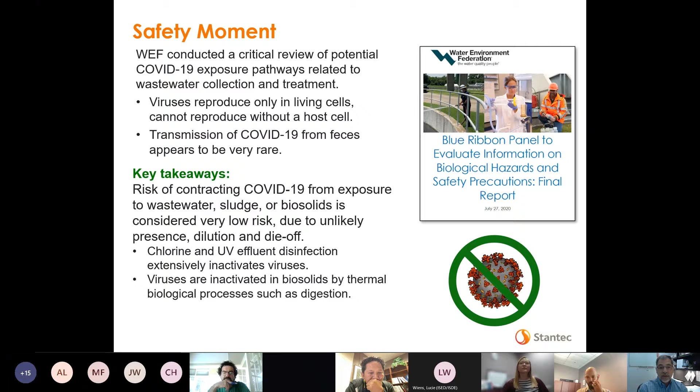We're looking at how can we get the foodstuffs and other important materials to these locations while not starving out other parts of the planet. We're looking at a crisis situation soon where if we do not start looking at how to use our resources better, we will end up in a shortfall, which will create a whole number of issues globally. So the forecast here is we're developing at a very rapid pace, and can we supply the demand?

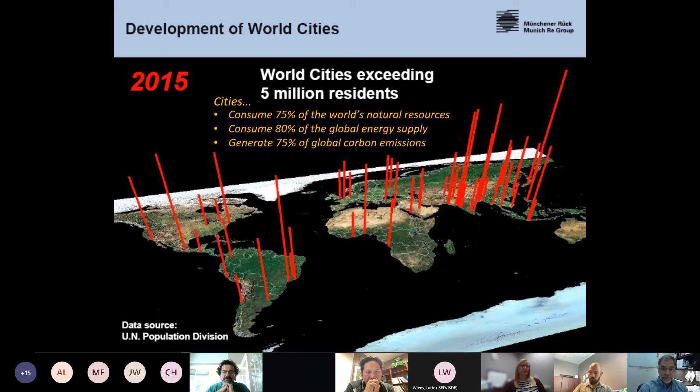Now, as a point we were talking about earlier, let's de-link economics from resources. We've always talked about supply and demand, but when you don't have enough resources, there's a whole other issue that can develop. Fortunately the economics have grown very well - we've done quite well in North America. We're talking about advanced technologies, specialized materials we need to pull out of the mines to make the chips that go with this. We've got lots of natural gas and oil and hydropower to generate electricity.

Our cities have grown, we're putting in more green space. However, if we get into urban sprawl, we take productive land out of production. So we're beginning to see densification in city centers - let's go up rather than out, so we can preserve these green spaces.

Global commerce - I'm sure we all shop at Amazon and realize how much is being shipped around the world in these containers. There's just so much goods moving around, and you have to think about all the energy and fuels being used to manufacture and move these products around.

And lastly, closest to home here, is intensive agriculture. There is more and more demand for foodstuffs. Manitoba, Saskatchewan, the prairies - we're in a very unique situation where we do have the ability to grow, but how much can we supply? How much can we grow without damaging the environment?

Unfortunately, what we're seeing now is the urbanization impacts of this intensive resource demand and the products we're delivering. Our air—we're talking about carbon taxes, climate change and how that's factoring in. Excessive nutrients are getting into our waterways, turning them green and fouling them for other habitat in the flora and fauna. We're now looking at farmland being overworked, becoming a desert. Add in a drought like we're experiencing this year, and that puts tremendous stress on our ability to supply food. And lastly, mountains of resources going into landfills as waste. We cannot continue to do this—our resources are being consumed at exponential rates.

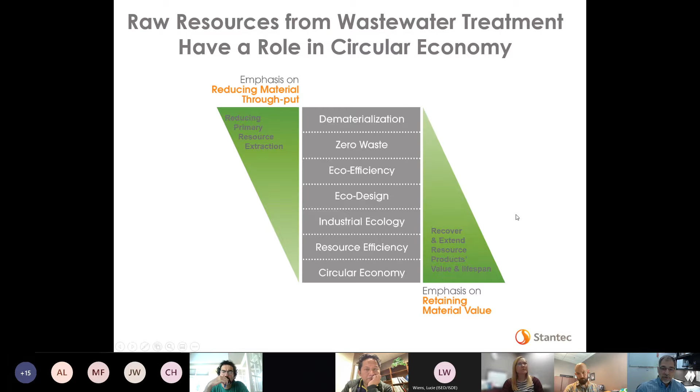Now I'm going to focus here on the wastewater aspect of this, but there's lots of waste that comes out of these different areas. I call them the residuals. We should not call them waste. I find that these are resources, and when we use the wrong terminology, we tend to put it into a category we ought not.

So really it's a resource factory. These residuals sent to treatment plants can be productively reused. For example, primary treatment can result in a lot of good primary sludge, which is rich in carbon that can be reused for multiple purposes. When we digest the solids, we produce biogas. You can generate green electricity from burning these renewable gases. The properly stabilized sludge can be reused on farm fields where it's put back into production.

Nutrients, we are now extracting nitrogen and phosphorus so they can be selectively put back out on the lands as can be used. More importantly, there's water. As we're experiencing this year, a drought year, we have a lot of water going back into the rivers and going for irrigation and other purposes. It has tremendous value, and of course it's disinfected to make sure it's properly sterilized so it can be used and not impact public health.

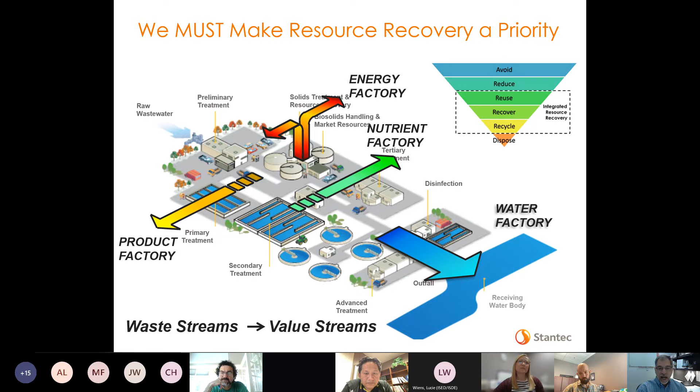Now the upper triangle here is a very important one where we talk about integrated resource recovery: reuse, recover, recycle. How can we find value for these products and not let them go into the landfill or some non-productive area? So the focus is, when we send these resources to this resource recovery factory, how can we put it back productively into the mainstream?

Now this is where we start getting into what we talk about as integrated resource planning. We start looking at where we are today. Why have we done what we've done today? What are the drivers, and what are we looking at in the future? So we need to start looking ahead to our investments in the next 5 to 10 years and use that as our guiding principle.

Not to say, oh, we need to expand, rather let's look at why we need to expand or upgrade, and look at the factors in advance so that we are building our businesses, supply chains, and resources in a way that's sustainable to the future. So we need some formalized strategies to make good and timely investments in this.

Now, the public needs education as to what is required. We as industry leaders need to get that messaging out to them, but also keep our listening ears open—we do have a very well-educated population out there that is now sounding the bell saying, we want better, we need to do better.

Now, this example here: what is the perfect wastewater treatment plant? Well, the perfect wastewater treatment plant is one with no waste. It is a true resource recovery facility. That is the fundamental basis of the circular economy—sustainability.

Earlier I had a chance to chat with some members of the Food and Beverage Committee here, talking about what we call sustainable. That means we're doing what we need to keep our systems balanced. Well, that's not good enough. We have to start thinking about what we call the regenerative economy.

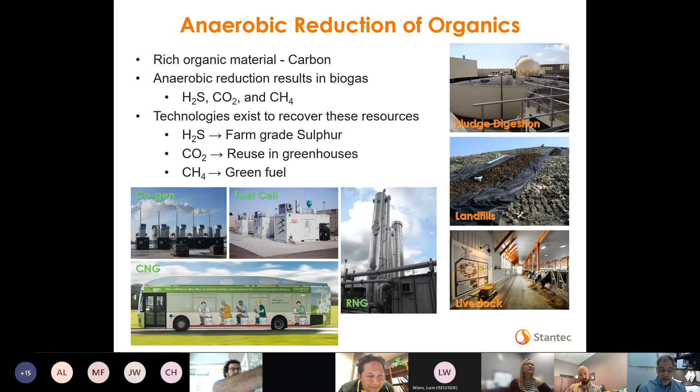Now, this is a very interesting project which I happen to be part of, just outside Washington, D.C. They bring sludge from four other large wastewater treatment plants to this location, where it's converted into energy and a reusable resource.

This is what we refer to as Class A biosolids—odorless, highly sterilized, fully stabilized. This is the kind of stuff that smells like earth. When farmers get this material, they love it. It has significant value in terms of nutrient content and soil texturing.

As part of this, the biosolids go through a digestion process where the gases are collected, conditioned, and converted into renewable natural gas, which is pumped back into the natural gas pipelines, or converted into heat for on-site use, or electric power put out into the grid.

This project was built for 235 million US dollars—that's 350 million Canadian. This is the kind of project I would love to establish here in Manitoba, where we have the opportunity for a win-win-win situation, taking these residuals and turning them into something we can all benefit from. It's green energy, and I think we have the opportunity to do that here.

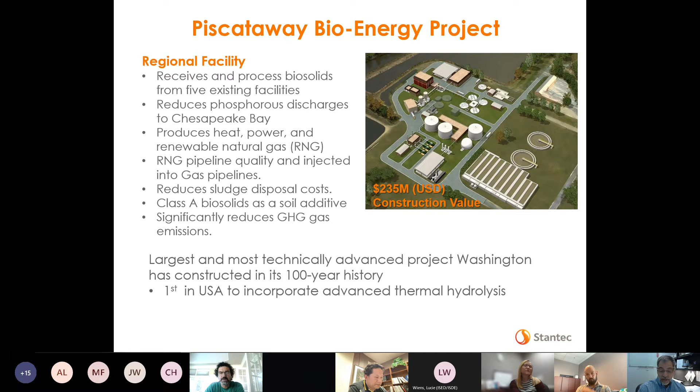Phosphorus recovery. We talked about the expression 'peak phosphorus'—there was concern that we'd run out of phosphorus worldwide, and this precious resource would limit how much farming we could do and how many plants we could grow.

So someone was quite clever and figured out how to extract this phosphorus source from wastewater and turn it into a pure crystal. These crystals are called struvite, magnesium ammonium phosphate, which is a slow-release fertilizer, so it also has nitrogen value.

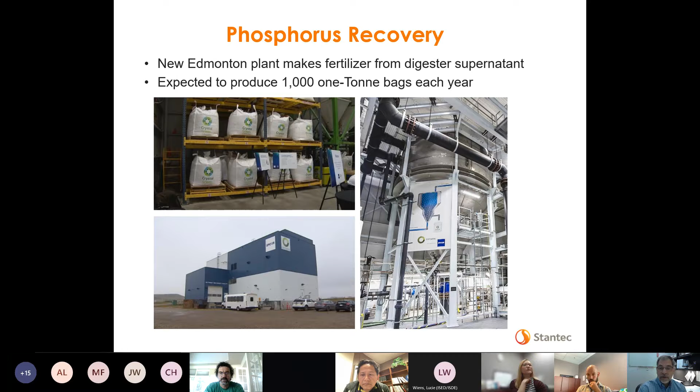This plant is another one I worked on, out at the Gold Bar wastewater treatment plant. It's a state-of-the-art facility that generates 1,000 one-ton bags each year. This material is put back out to industries that can use it, primarily farming and others. This is a good example of phosphorus recovery from wastewater, and we have a lot of wastewater plants—it shows the elemental value we can get out of it.

Something you don't really think about: sanitary grit. At the Edmonton wastewater treatment plant, they call this the odorous grit—the stuff they suck out of the pipes and wet wells that accumulates into this gritty material. This facility was designed to wash that material and recover the grit and the organics associated with it, producing clean grit with just a little bit of junk coming out. We went to Europe to see what was being done there.

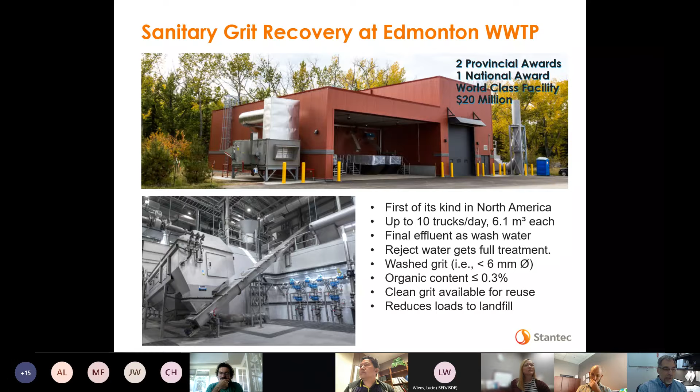So we wash it, we clean it. It doesn't go into landfills, taking up valuable space. It's another view of how a resource was not looked at in the proper lens, but once you do see it, you're saying, well, yeah, why can't we recover that?

Let's go to one of the most important resources, water. During our drought cycle, and I really do sympathize with our farmers and agribusiness to the south of Manitoba and in Saskatchewan, it's been a bad dry year for them. We're not getting the production.

Now we have the ability through membrane technology to create an ultra-high pure water, in fact even through reverse osmosis, so it's drinking water quality. The technology exists, and it has a small footprint. It's used in numerous locations. What I'm showing here in the background, this facility is actually in Kananaskis. It's a beautiful location, and why was it built there?

Well, it's discharging into the mountain streams, highly pure mountain streams, so they cannot afford to put these nutrients into it. They need to keep it as pristine as possible.

Now that same technology we're using elsewhere in different treatment plants, in water plants. So we can now take what you see on the bottom here, which would be your dirty wastewater that comes in, and by the time it comes out here, it literally is drinking water. You can, with the technologies that exist today, remove those elements and get it to the point where you can reuse it. So again, looking at the need here and growing the agro-business in Manitoba or Saskatchewan, water is such an essential item, and we can take a look at how we can best reuse it for these purposes.

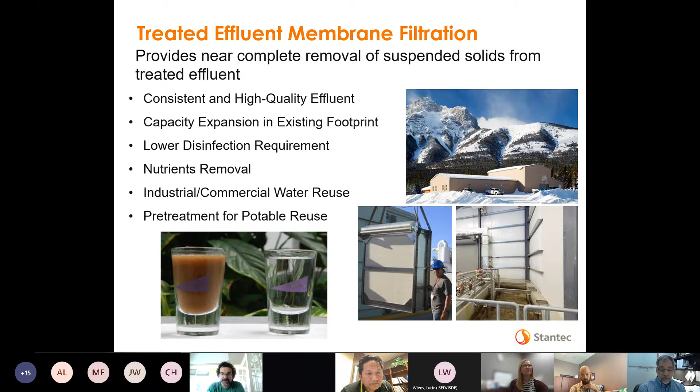Energy: the less we use, the less we need. We're looking at how to optimize more efficient systems. Again, for manufacturing, pennies on the dollar, but yet it's less demand on our resources for natural gas and other power. So we're not putting those demands and stresses on our resources, but finding ways to find that balance.

Now, what we're looking at with wastewater treatment plants is the concept called energy neutral, so that we generate as much energy as what we use. We're now looking at it as energy positive. We have the ability to be a net exporter of energy. And once we get to that point, then we'll be able to use the wastewater treatment plants, or resource recovery facilities -- so every time you hear 'wastewater treatment plant,' think of the word 'resource recovery facility.' We will now be able to put nutrients and other energies back into the system for productive use.

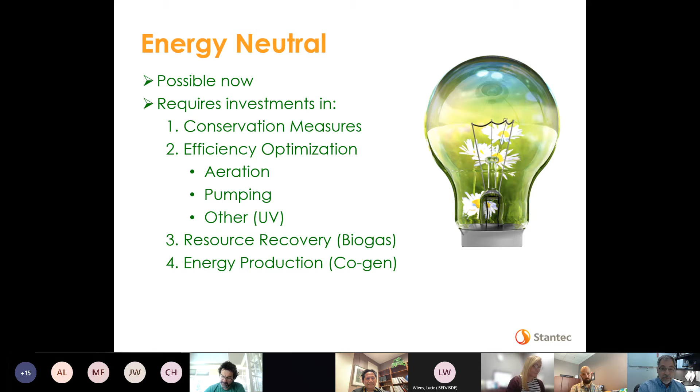Now I'm going to get into some really cool topics here, the concept of biomimicry, which is basically following what Mother Nature did, and can we use it as a good example of how we should be building our systems, looking at it from a different level other than these hard mechanical chemical facilities. What can we do that mimics the patterns that Mother Nature has shown us along the way?

Here's an example of hydroponics. This goes even further, where we can also have aquaculture going with it. So they're looking at how Mother Nature did this, and we start looking at the root systems, and they're going, well, that's interesting -- so why don't we create biofibers that mimic how they collect the nutrients or clean the water out of systems? I'm going to give credit to the source of these.

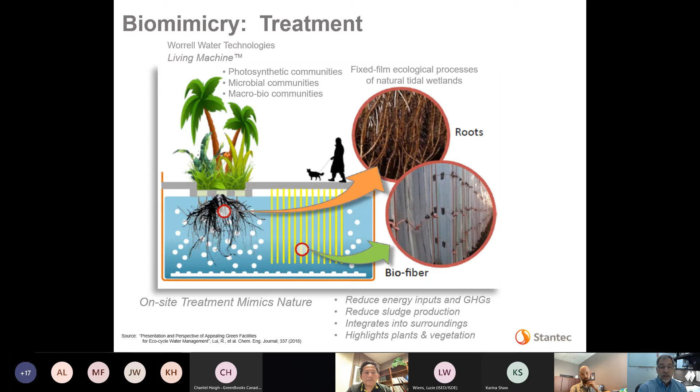And these all come back to what's called the living machine. We're getting much better at understanding how our natural systems have behaved and how we can use them to our benefit, especially in producing food in terms of new settings. Let me get to that.

When we look at the conventional treatment of wastewater, we see these big treatment plants, and they filter and do some chemical processes, some biological processes. But now we're starting to look at algae as a tertiary treatment, where they're pulling up all those other nutrients that can be recycled more productively for other uses, in terms of algae-based plastics, nutrients, and oils for energy. So what we're sending out in our wastewater, we can now use other principles from nature to extract those very valuable resources.

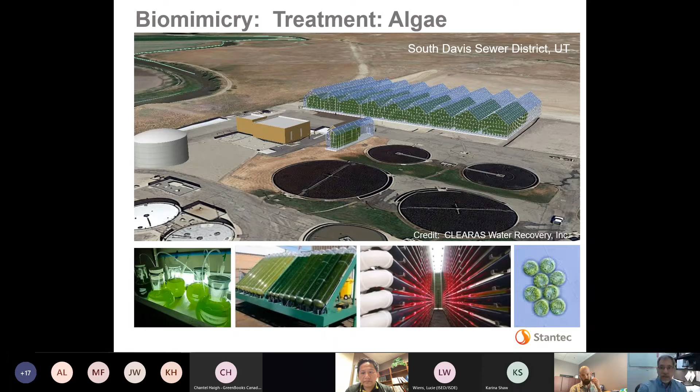And these are live projects, by the way. The images are real, and these are systems that we have worked on and promoted, especially, as you can see here, in very arid areas where water is extremely precious.

We have the technology to recover resources. We have the examples from Mother Nature. We have the science. We have to change our behavior patterns and become more socially acceptable in what we're going to be recovering and how we're going to be doing it. So the more people we have on board, the better chance we have of being a very successful society and reducing our resource demands.

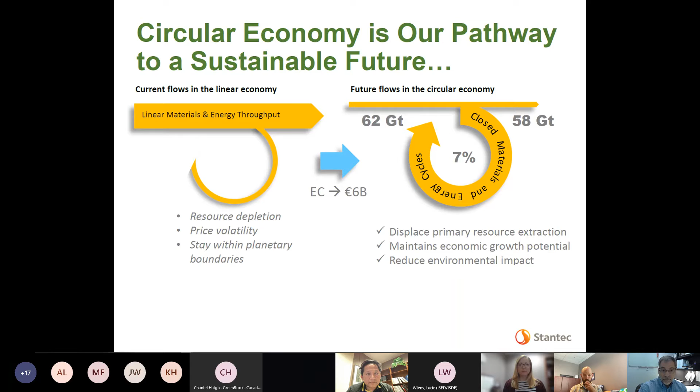So I'm just going to summarize this right now. There's a lot of uncertainty. That's the new norm. We're dealing with climate change. We're dealing with supply chains. You throw a pandemic in there and all of a sudden all the systems that we were so accustomed to have been disrupted. So there's uncertainty. We're having to deal with that and how best to handle it.

It removes those perverse ways that we do business now and creates a much more sustainable method. And again, our treatment plant - every time you see wastewater, it's a resource recovery facility. Change the paradigm of thinking. If you change your words, you will change your paradigm of thinking.

What the real challenge we have here is how much time do we have to do this? The longer we wait, the more we're put in the corner, and we will not be able to do this cost effectively, nor can we respond in time. So the urgency, as you hear now, we're ringing the alarm bells now.

So part of this, the paradigms must change. The way we have done, and we were looking for a paradigm shift in terms of looking for the circular economy or the regenerative economy as our driving principles.

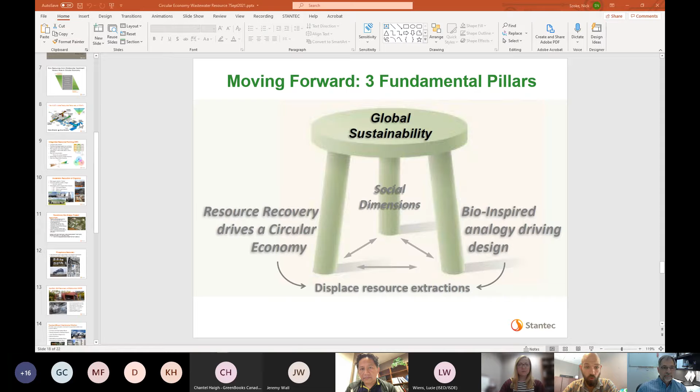Maybe I'll start off and ask from the perspective of our members—you gave some examples of some really big infrastructure projects. Are there things that individual companies can do on site at a smaller scale that can help them? In the food industry, water is often used for everything from washing to the actual processing, to various aspects of adding quality to the foods they're looking at. Are there things companies can do on that smaller scale where they can participate in that mind shift as well and begin to see some of the benefits within their own processes? Or is this something that the economies of scale at this point are better left to these large infrastructure projects?

Well, I'll start off with the most fundamental one: water conservation. Many industries—well, water's expensive to produce. It's a resource that we're extracting from different locations, especially during a drought. There will be limits on that. So water conservation is something we can practice through more efficient devices for water delivery, whether it's for cleaning or other applications. The other thing we do are energy audits. We look at the businesses and say, can we find more efficient ways for you to run your business so it's more cost effective rather than using outdated electrical mechanical equipment. It's more than just changing light bulbs—we look at where the big power consumptions are.

And lastly, recycling—that's always one of those things where we look at what can we reuse first, what don't we have to throw out. We find that even from the home standpoint, when you start looking at how can I work on a thinner budget, how can it be more practical, I think the same kind of thing comes with these industries. To put out a global statement, I'd have to spend some time with the industry, understand their needs, and come up with an industrial plan with them that makes the most sense in terms of resource recovery. I'm working with certain clients right now doing exactly that. And the beauty of it is we have a repertoire of clients across different types of industries—so when we talk to a distillery, or a potato manufacturer, or someone producing honey or milk, we can reach into our grab bag of experience from elsewhere and help them. So we try to customize it as much as possible so it's the most meaningful benefit in terms of where they make those investments.

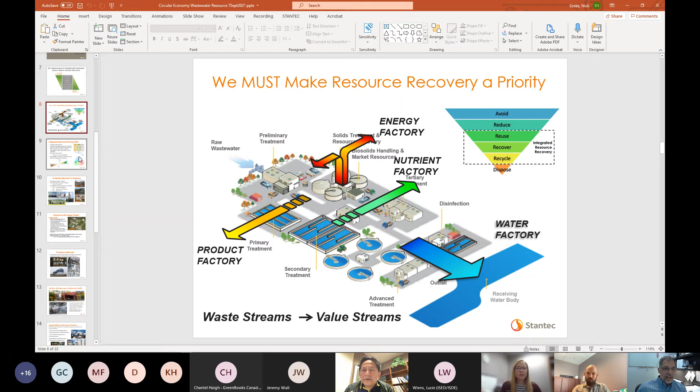I'm going to switch to this slide because this one here is always quite provoking, or provocative. Okay. Hi, Nick.

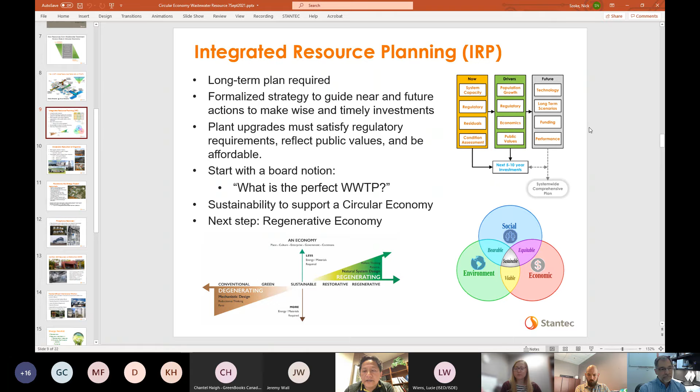Someone else asked regarding phosphorus recovery systems: one, what type of wastewater treatment plants are able to implement this? And two, do you know if recovery is less energy intensive than mining?

Phosphorus recovery, one of my favorite topics. It's usually the medium to larger size mechanical plants that are most primed for this. This is where we have decentralized treatment plants, and if we were to regionalize, we could look at it on a regional scale, just like the Piscataway bioenergy project. To do them individually becomes very cost ineffective, but when you pool your resources together, it becomes much more cost effective.

Now the mine—this is the perverse part about phosphorus. Is it cheaper to buy it as we mine it, or is it better to pay the price now and have it recovered as an element? The challenge we face is like the laws of supply and demand. It may come up cheap from mining for the next 10 years, but in the 11th year, all of a sudden the price of phosphorus jumps by 2, 3, or even 10-fold. Are you prepared for those systems?

So if you don't make those investments now, you could be tagged much later. We're not thinking it's 10 years away, saying 'well, we'll deal with it then'—no, that's the wrong philosophy. If we don't start looking at it now and prepare for those impacts, how have we future-proofed for that transition when the resource becomes scarcer? That's when the laws of supply and demand kick in, and you're paying much more for something that, had you invested in today, would come at a lower cost.

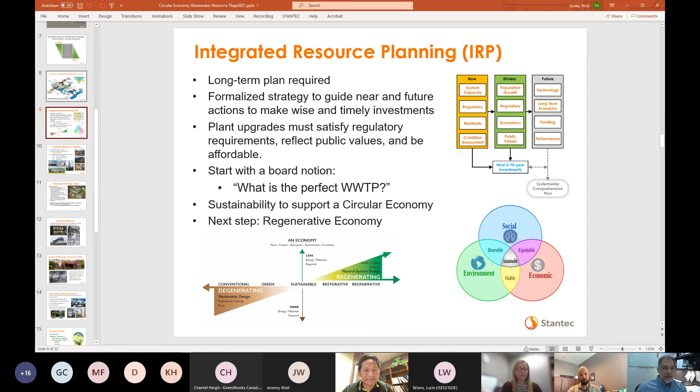Okay, thanks Nick. So another question we have is: do we know the carbon emissions of recovery versus mining? Let me go back to this particular slide because it'll help put it into context.

When we're recovering nutrients in this factory, the carbon that comes into the plant is either put back out as primary sludge, which can be used for other purposes, or it can be used in digestion. The gases created are reused. So we can actually take a wastewater treatment plant and make it carbon zero, meaning we're not emitting carbon beyond what's being reused. There's a lot of efficiency to be had simply by looking at it as a resource factory and maximizing every part of it. So the short answer is, we can recover nutrients, and we can do it in a very carbon efficient way.

So I have another question here, Nick. Thanks. Is phosphorus recovery a private sector driven or a public sector driven project?

I'm going to use this expression: both. Yes, by all means, we should all be conscious that phosphorus recovery is very important, and our financial systems need to recognize how we can do this most cost effectively. So it's in all our best interest to view phosphorus recovery from both a public and private standpoint.

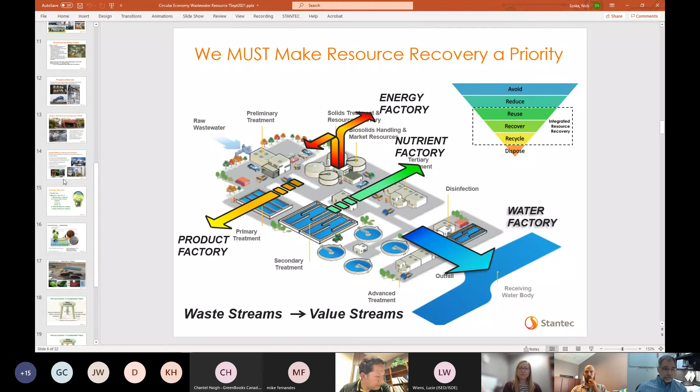So if we can do that with our liquid streams as well, where it's not cost prohibitive—we've got lots of miles of piping that would have to be put in and so forth. But there are certain aspects, like with the sludges and how they're treated, this could be a good start for different municipalities. The liquid stream, well, we'll have to have a much bigger discussion, and I'm sure that when I talk to the Winnipeg metropolitan region, they're thinking the same thing: how do places like Selkirk and Winnipeg and others maximize their facilities.

So there are some challenges here. I don't think I can give you a complete answer to it, but I think the discussions of looking at regionalization make a lot of sense.

Thanks, Nick. Yeah, the work I do is mostly along the lines of waste management, recycling and packaging, and all those different pieces. So it's interesting to hear it's a similar kind of challenge in many ways with wastewater treatment. But I do think that's the challenge for Manitoba, is how do we find policies and programs and initiatives that we can move forward on medium-sized scale, large scale, or small scale—all the different variations. Yeah, these are good examples of that. So I appreciate it. Thank you.